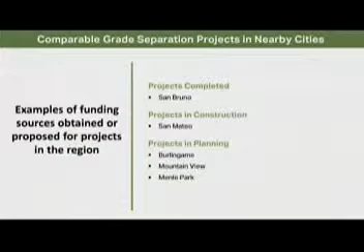City staff asked us a really good question, which EPS's previous consultant also looked at in their white paper from 2017, but we've now updated a bit: examples of funding sources obtained or proposed for actual grade separation projects in the region. We looked at five different projects: the only completed one we found was in San Bruno, one under construction in San Mateo, and projects in the planning stage including Burlingame, Mountain View, and Menlo Park—all communities facing similar challenges to Palo Alto in assembling a capital stack to build grade separation projects in these fiscally constrained times.

For San Bruno, it was a much smaller project than what you're contemplating here. It was a project cost of $155 million, completed in 2014, of which most of the dedicated funding came from the San Mateo County Transportation Authority Measure A. Another $55.9 million came from state funds, Proposition 1B funds, and finally there was a small federal amount of funding of $6.6 million.

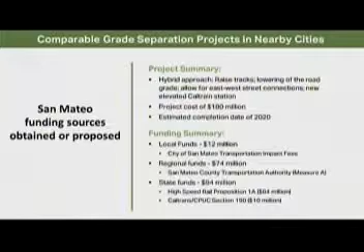In San Mateo, which is the project currently under construction, it's a hybrid project in the nomenclature of this process. It's $180 million, and will be completed, assuming all goes according to plan, in 2020. The capital they put together was also mainly state and regional: high-speed rail Proposition 1A, Caltrans CPUC Section 190 funds, San Mateo County Transportation Authority funds, and finally a small amount from the City of San Mateo's Transportation Impact Fee Program—that was the local source.

Let me get through and then you can ask questions—I've only got a couple more slides. Yeah, we'll open it up. I'll do you first, David.

I'm going fast. Other cities looking at this include Burlingame, Mountain View, and Menlo Park, and in the main they're looking at things like San Mateo County Measure A, Santa Clara County Measure B, which is relevant here, the Caltrans CPUC Section 190 funds, and local sources like transportation impact fees and what we might call value capture approaches—using city land or land that could be upzoned to generate additional real estate value that could be captured by the local jurisdiction to fund infrastructure.

Just some general summary findings which build on much of what we've already talked about at this and previous committee meetings. One reason we're looking at financing is that federal funding has been very limited for completed or under-construction projects, and we're not anticipating that will change. High-speed rail funds have been critical for projects completed or under construction, but this will likely be an unreliable source of funds in the future—not a source I would look to strongly for Palo Alto now.

Regional transportation measure funds have been and will continue to be a critical funding source for projects—particularly true here, specifically sub-regional sources. Local funding sources such as transportation impact fees, value capture approaches, and other types of fees assessed on employers have been explored, but have yet to make up a large contribution to actually completed or proposed projects. That's where we're going as a field, looking for ways local communities can raise more money to support these projects. But thus far, we don't have any examples of completed or underway projects where the local funding source makes up more than a very small percentage of the overall bucket of funding.

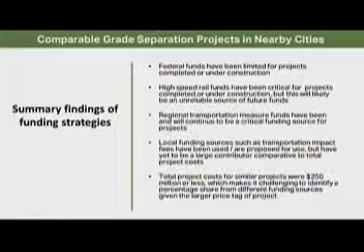Of the total projects we looked at, one challenge to the comparative research is that Burlingame had one alternative they were looking at, which was $960 million—the biggest chunk of money we've seen discussed related to grade separation on the peninsula. Their preferred alternative came in at around $250 million. So at least in the range of estimates we've seen, your grade separation projects would still be at the very top end in terms of capital costs, making it a total capital funding challenge on one end of the spectrum. But then again, you also have this very dangerous intersection, 8th in the country.

That's the summary I have for today, and I can take questions now. Okay, David's starting, and then I see Megan, Nadia, and Pat. We're going to have a few questions.

Quick question on the San Mateo project—do you know if any eminent domain was done for that project? No, but remember in San Mateo that area was the Bay Meadows project, so that's the local transportation impact fee because it was part of that whole thing. That whole area was getting redone anyway, and that necessitated some grade crossings. It would be Caltrans that would have to do the eminent domain taking, right? It could be the city, or it could be Caltrain, or the city could make it part of the bigger project with Bay Meadows.

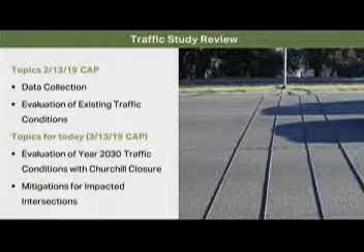So today's intention is, yes, we have done all the data collection, we have submitted the existing conditions report, but today we want to really talk about the intersections that have been impacted due to this closure, that we have seen will be impacted in 2030, and what are the mitigation measures that we are proposing for those impacted intersections. I just want to remind everybody that the mitigations are really important because we have gotten many requests to just close down things and see what happens.

I think Ed and the others in city staff have said we would never choose to do that. You would always put your mitigations in first and be strategic. Then when you close things down, hopefully things aren't so bad. So I think we want to make sure you understand the potential mitigations because they would go prior, so when you close, you have those in place and hopefully traffic runs fairly smoothly.

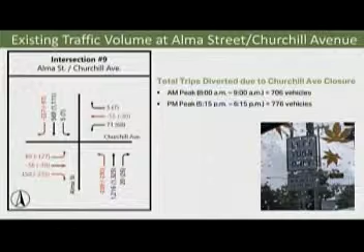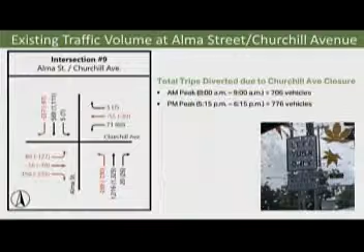Yeah, that's correct. So this particular slide kind of indicates that all the numbers we have in red text are the numbers that need to be diverted due to the closure of Churchill. We are looking at approximately 700 to 750 vehicles to be diverted during the peak hour. Just wanted to point out that even today at this particular intersection, we do not allow through movement from 7:45 to 8:30. So it's kind of going to be a same situation, but over the 24 hours.

Trip distribution is basically based on the Palo Alto travel demand model as well as the OD data that we had collected. As you can see, the maximum traffic will be diverted to Embarcadero, Oregon Expressway, as well as Emerson Road. If you want to look into it in more detail, I'm available to talk about it after the meeting.

Question, point of clarification: are you saying that traffic is just the through traffic or also the turn traffic? Also the turn traffic. Okay, yeah.

So based on the analysis that we did, we looked into these 8 intersections to be impacted. And when I mean impacted, it means that the level of service is at an unacceptable level today as well as in the year 2030.

When we started looking at the proposed mitigations that could be implemented at these intersections, we thought that intersection number 3, 4, and 8 need to go together because they are very closely spaced, and whatever we mitigate on one intersection would not just work by itself. So it would be a good idea to mitigate all 3 of them together as a group.

The next 3 intersections are CMP intersections, and the level of service criteria for those is level of service E, to consider that it is working at an acceptable level. The other 2 we're going to talk about are Alma Street and Oregon, and intersection number 15, which is Embarcadero and Cooper.

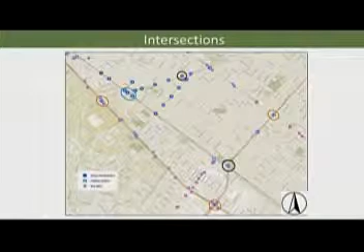Just a graphic to show you the locations of these intersections that we are talking about. As you can see, 3, 4, and 8 are really closely spaced, so whatever we do at one is going to impact the other 2.

Talking about intersection number 3, 4, and 8, here are just the existing controls that we have at these intersections, as well as the existing turning movements that are going to be rerouted. So the ones in red, we are deducting from that intersection, so they won't be showing up at that intersection. The ones shown in green are the traffic that we are going to add at that intersection.

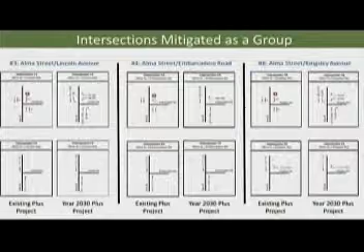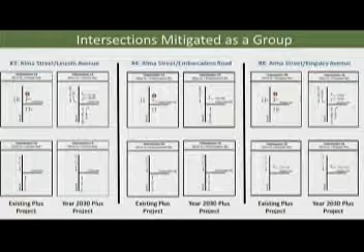This shows the numbers for existing, plus project conditions, with the closure, and year 2030 plus project. When we evaluated these intersections, we know even today they do not operate at an acceptable level of service, they operate at level of service F. But when we take this further and close Churchill, we'd see more traffic diverting, making it even worse than today. So we need to mitigate them.

The reason these intersections are experiencing such high delay is because of the westbound left turns. The through movement is so heavy that you don't get enough chance to make that turn and merge into traffic, and that's where the delay is caused. When you look at the entire intersection, it's not operating at an acceptable level of service. We also ran the traffic signal warrants, and they do meet at the intersection of Alma and Kingsley.

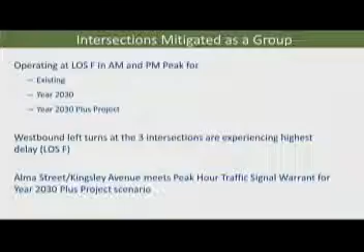So what we are proposing as mitigation is that Lincoln Avenue be right-in, right-out only. Move the traffic that wants to make the left turn to the intersection of Alma and Embarcadero, and signalize both intersections, Alma/Embarcadero and Alma/Kingsley, so they work as one single group. That could be done with just one single controller, but two intersections working together.

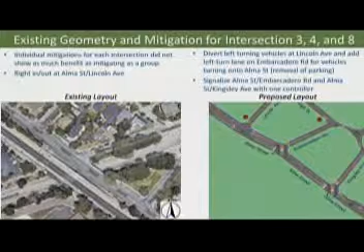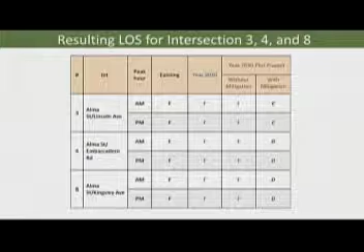If we implement that, as you can see, existing level of service is F, year 2030 it is F, and once we close Churchill it would still stay F. But if we implement these mitigations, we would see an acceptable level of service, as you can see: C on intersection number 3, D on intersection number 4, and D on intersection number 8, which is much better than F.

Here are some of the concepts we have created. This is the near-term option, considering we do not make any changes, just with the infrastructure we have in place today - what could be built out there. We could have the left and right-out movement from Embarcadero so you can make that left turn, signalize them, giving you an opportunity to make the left. So this is with your existing infrastructure.

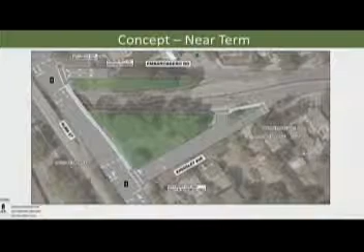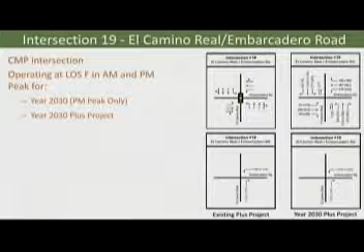The next intersection is intersection number 19, El Camino and Embarcadero. It is a CMP intersection operating at level of service F in all the peaks, not in existing - it is E in existing. CMP means congestion management program, and yes, it is managed by the county.

When you say long-term, how does that measure? In other words, what's the interval between the conditions that get worse, the F-minus conditions? Right now, when we say long-term, we're looking into the year 2030. So there are two different things: year 2030 is your long-term year, but if you're talking about mitigations for long-term, that will depend on how funds are available and things like that. So I don't have a year - probably Ed could answer that question.

Moving on to the intersection of El Camino and Embarcadero, we are proposing to install an additional westbound left turn lane as well as a northbound right turn lane, and optimizing the signal timings so that it can come back to an acceptable level of service.

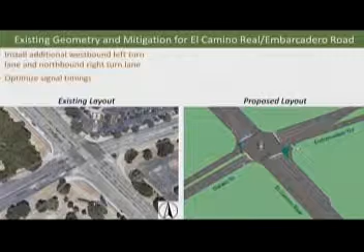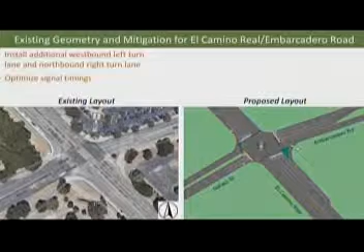You can see the proposed change on the proposed layout. The existing map shows what is currently out there, and what we are proposing is shown in the synchro layout that we are showing as the proposed layout.

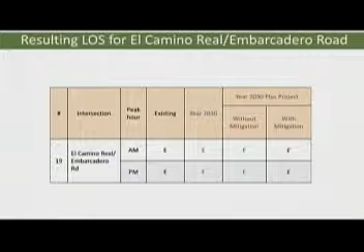If we do that, then we can get our year 2030 conditions back to an acceptable level of service, which is E. It doesn't get extremely better, but it does get back to an acceptable level of service.

The next one is intersection number 21, again a CMP intersection managed by the county, working at an unacceptable level of service in year 2030 with the project and without the project.

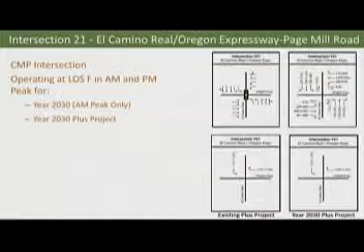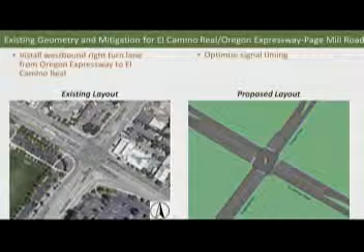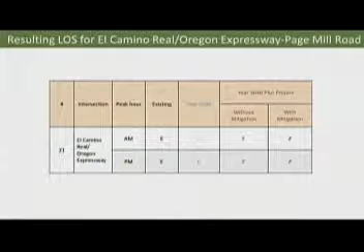We are proposing to install a westbound right turn lane from Oregon Expressway going onto El Camino, and optimizing the signal timings. That would reduce the delay at this intersection. It doesn't really make it better, but it does reduce the delay and brings it to what the conditions would be in 2030.

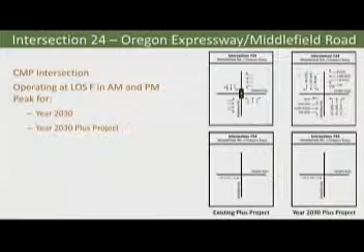Intersection of Oregon Expressway and Middlefield, again another CMP intersection, does not operate at an acceptable level of service in year 2030, with or without the project.

Our mitigation is to remove the southbound through and right lane and install an exclusive right turn lane, modify the signal phasing to include overlaps - meaning your left turn and right turn can go together without being stopped, so there's a continuous right turn movement rather than stopping and then making the right - and convert the northbound right turn lane into a shared through and right lane, adding an additional northbound receiving lane.

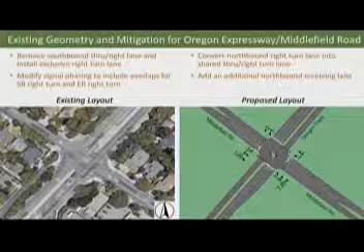I know it's a lot. That's why we sent it early. Yeah, but we are here, as I said. Just to be clear, we didn't see any of this until today. Oh, okay, there was other stuff, never mind. We're seeing this live in places, just to be very clear, making decisions today, so. Sorry, my bad.

We do need to keep in mind that the city is continuously looking into providing infrastructure for other modes of transportation too, and with that we would see a good amount of mode shift. It would be possible that some of these mitigations would not be required because you would have more people bicycling or walking for some of their day-to-day activities.

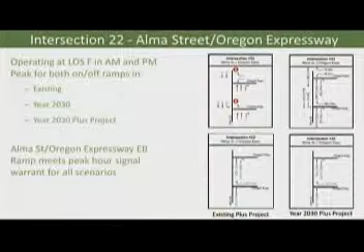The next one is intersection number 22, the on and off ramps with Oregon Expressway. It does not operate at an acceptable level of service in existing conditions as well as in year 2030, whether with the project or without the project.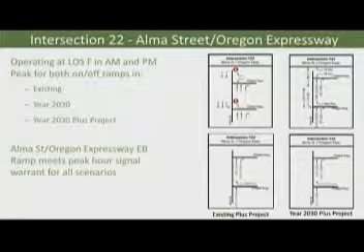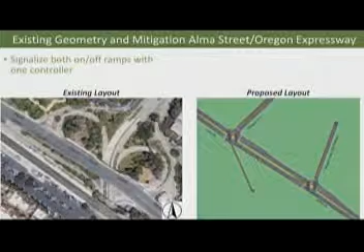We did run the peak hour warrants, and it does meet peak hour warrants for a signal, so a signal could be installed at these locations. That is what we are proposing - that we should signalize both the on and off ramps. That way we would have a smooth flow of traffic.

If we do that, then our level of service improves drastically. As you can see, F goes to A, and F goes to C at the other intersection.

Intersection number 15, this is the intersection of Embarcadero and Cowper. It does operate at an unacceptable level of service.

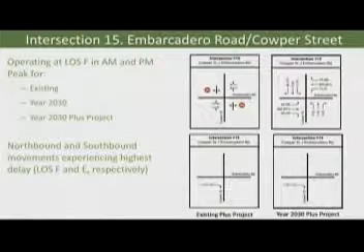As you can see, there's not a lot of traffic coming from the side street, but because there's a lot of traffic on Embarcadero, they have difficulty merging onto Embarcadero, and that's where the delay is, because they do not find enough gaps to merge in. That is the reason this intersection is working at an unacceptable level of service.

What we are proposing is that Cowper could be converted into right-in, right-out only in both the northbound and southbound direction. This could be done either for 24 hours or just for the peak period, because that would divert that traffic onto Waverly and add it to the existing volume there. Because the volume is so low, it really does not impact existing operations at the intersection of Waverly and Embarcadero.

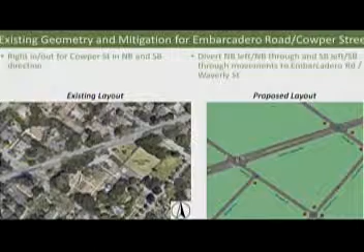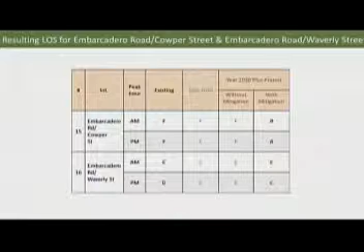As you can see, if you do that, the level of service at this intersection would get better - from an unacceptable level of service of F, it would operate at an acceptable level of service B. And looking at intersection number 16, Embarcadero and Waverly, it does not impact that intersection - the traffic we add to Waverly is so minor that you won't even notice it.

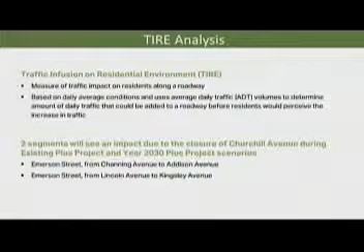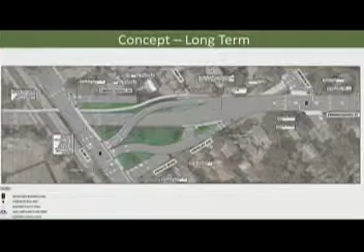So that's a widening, what I mentioned about, that once you take the bike and pedestrian path underneath the bridge, it gives you room to widen Embarcadero and add the fourth lane. But does that mean you have to do a whole new overpass? You're gonna have to do the whole thing over again.

There might be a way you can work it out. You could use the existing structure and still manage to get it done. Okay, we'll let Etty weigh in, so you guys got traffic guys talking about construction projects. Yeah.

Anyhow, this is just a concept at this point. Gary, we'd have to look at what that impact would be to the whole overall structure itself. What his concept here is to take the bike lane, and maybe you modify the abutment and then you can gain a lane, but we'd have to actually look to see its viability from a construction and structural standpoint. But that aside, this is just looking at the number of lanes and how that is mitigated from a traffic solution standpoint. But thank you, that's a good observation.

Stuart Hanson, Duveneck, just a quick question. Are you planning to do another study like this with Palo Alto Avenue closed to see what happens to traffic on Embarcadero and so on? So City Council took an action, when was that? January, that Palo Alto Avenue will be included in the overall downtown plan. So it's no longer part of our scope at this point in time.

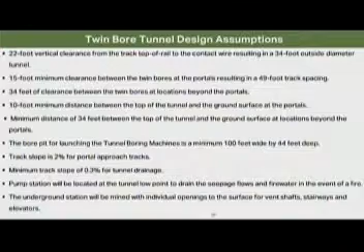The next slide here is really about the criteria. I'm not going to go over this because it's a lot of bullets, but this is the criteria used for the tunnels.

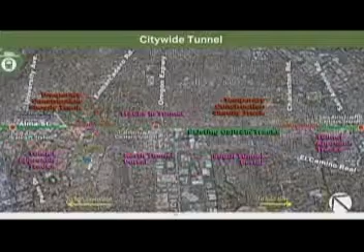This is just a plan view, which you actually see in the video. North is to the left and south is to the right. The red indicates where we have to build shoofly tracks for the north portal and the south portal, which we actually have to build in order to get the tunnel boring machine in and actually bore from those locations that will go underneath the California Avenue station.

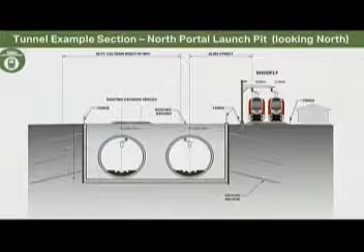At California Avenue Station, now we'll just go through the video, and I'll try to narrate a little bit about it, but there's a lot of text here. You've seen a portion of this already, as the north portal was presented at the last CAP meeting, and this is a video of the entire tunnel.

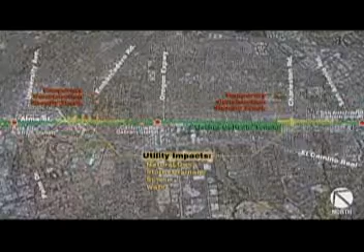So the first thing we're going to have to do is relocate utilities, get the property acquisitions, construct the temporary shoofly tracks, and then construct the portal. Whether you start from the north end or the south end, it doesn't really matter—you're still constructing a portal and getting your tunnel boring machine in.

So we're going to fly into the north portal. First thing is remove vegetation, acquire the property, relocate the utilities. Once that's done—and we have quite a few utilities within Alma.

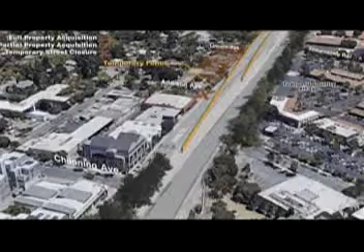The different colors here are full takes versus partial takes. You would also then close the streets that access onto Alma, which here we have Lincoln, Kingsley. And then once you have that, you would close Alma Street, because Alma Street would actually be the place where we place the temporary shoofly, which we would construct.

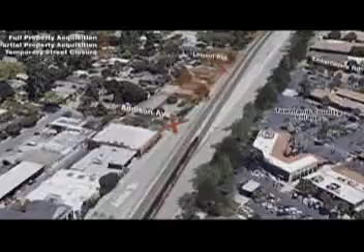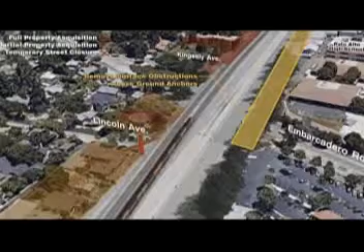And once you have the temporary shoofly constructed, you move the Caltrain trains onto that, and now you can actually build the trench section that allows you to get through. This also requires a complete reconfiguration of Embarcadero, because by the time we hit Embarcadero, we're only in a trench, so we would have to probably put Embarcadero in an overhead structure above the trench section.

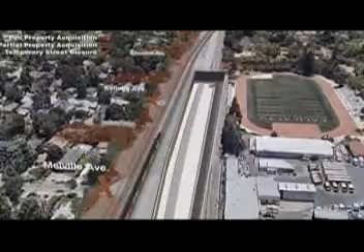You can continue to build this trench section. By the time you get to just about where Churchill is, you'll be at the portal, and there you can actually start your tunnel boring machines. In this case, we're looking at a twin bore, so you'll have two tunnel boring machines, or you can do one tunnel boring machine at a time. And then you start your bore, and you actually start to descend into a tunnel structure.

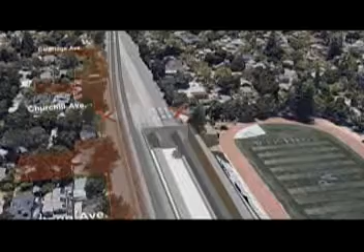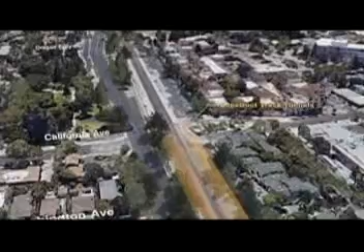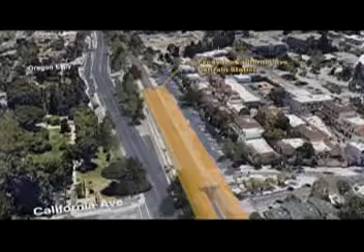When you get to California Avenue, we would have to reconstruct this entire station to a below-grade station. It would be roughly around 60 feet deep, so just think of all the vertical circulation we have to build into a train station that's below grade.

You could use a mining technique like they're using in San Francisco for the Muni Chinatown station, but it's still a complicated construction, keeping an above-ground station operational while you're building a below-ground station. The tunnels continue until we get to the south portal.

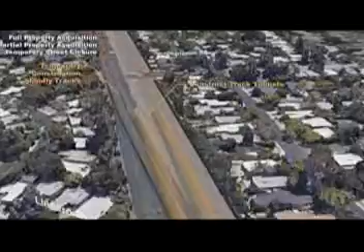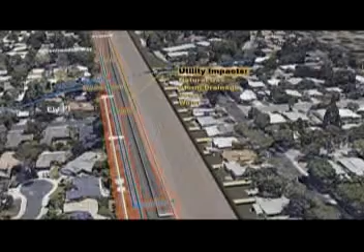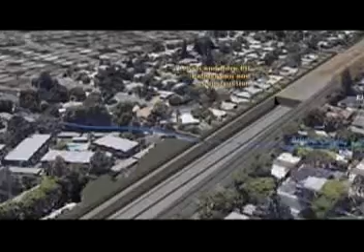And we do have some property acquisitions in the south section as well. We would also have to deal with the creek crossing because at this location we're in trench.

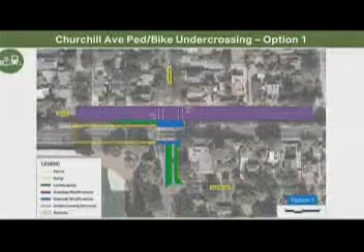I went too fast. Oh, you're doing it. We're both doing it, sorry, I have a keyboard. I don't, yeah, I have power.

You have power too. So this is a rendering of what that would roughly look like. You're looking at Alma Street, the sports field and the train, and you can see the undercrossing going under there and coming back up adjacent to the Embarcadero bike path right next to it. There's a number of things to work out, probably about the details of how it connects up, but this gives you a sense of what it looks like.

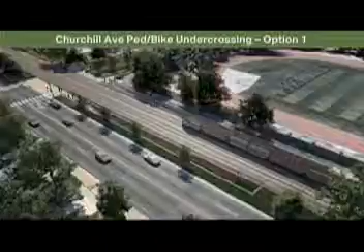Okay, I was watching Elliot to see if he was going too. So this is another rendering looking down the tracks. You can see the two ramps going down on either side of the tracks that give you access. Don't get too caught up in exactly how that access looks - the point is you have a plaza for access on one side, and some type of plaza or access on the other side.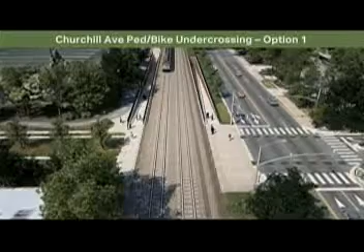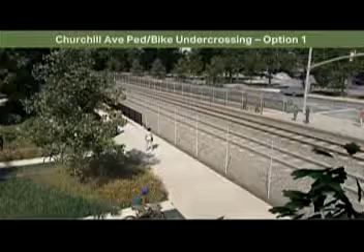How long is the ramp? The ramps are about 200 to 250 feet, and the undercrossing is about 45 feet long. Have you looked at whether people will use it or not?

I'm not sure where you're going with that, can we get through all this and then have a conversation when we come back to that? I really want to get this done.

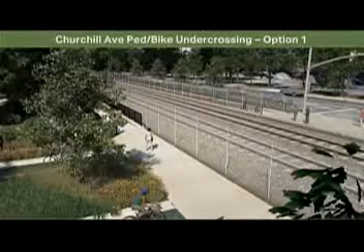So this is just a final rendering again from the side, on the school side, to give you a sense of option one. There would also be a stair access right along, as the Embarcadero bike path comes along parallel to Caltrain there, you'd have another access point which you could fit in, providing direct access to people walking on that path.

Just a note to self, we're showing standard Caltrain fencing along the right-of-way, but in reality it would definitely be wrought iron or something much more upgraded than that.

Gold-plated, Swarovski crystals. What about the fencing? We spend a lot of time on fencing, that makes a lot of sense, we'll make that a note. More and more renderings, very important.

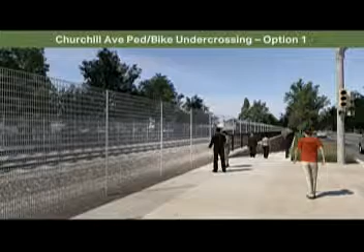And then this is again a view along Alma Street from that plaza going down onto the ramp, to give you a sense of that, again the fencing, but important to understand the appropriate kind of height and dimension for that fencing.

So the second option that we talked about is one that crosses both Alma and the Caltrain tracks. We went back and forth and looked at some ways to do this. The basic concept is that you have a tunnel or a ramp down that will start in the middle of Churchill on the eastern side of Alma Street, and then come out on the far side by the school, bending to put you in the general area of where you can maybe get access up to the existing path, or we need to figure that out a little bit.

We've done a little bit of thinking about how to make access to that central tunnel, which is atypical, so that it can be done as safely as possible. This is not a high traffic street, especially since you can no longer go through, so there's some room to be creative here. The other thing to note is that you do lose parking for the length of that tunnel and a little bit beyond, to enable the tunnel to fit in.

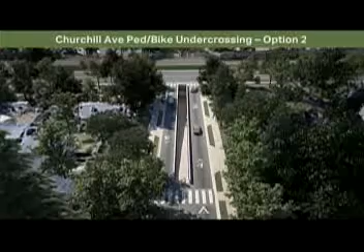Some renderings of that image - you can see we've got a little raised crossing right in front of the tunnel, so we bring vehicles down and slow them as they approach or leave the area of the crossing, which I think is probably pretty important, because we'll have people walking along those sidewalks coming across to the ramp in that location.

Here's an image of somebody biking down into the tunnel and then back out potentially to the other side. There actually are houses a lot closer than that, but you get the general idea.

On the far side, you have this opportunity to bring again some stairs, because you have a lot more space, so you can bring people out to the street there more directly if they're trying to access locations that aren't at the far end of that ramp, and you can see the ramp there as well.

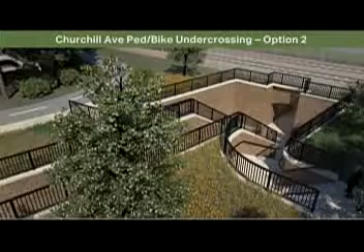So this is kind of a summary for you. Do you want to take this one? Similar to what we did on Meadow and Charleston, we have two options that we're looking at here, so we're just using that color code.

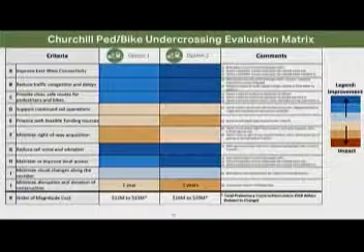Obviously some of the big differences are whether you cross Alma at one versus the other, and you do get some benefit from that. So two will be a little longer to construct because it's longer, more expensive, et cetera. But there are some distinguishing factors between those, and then there's another one too.

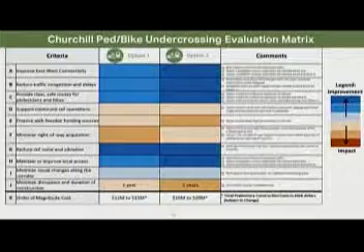That one is more just the engineering factors we've talked about before. All of these would be orange to red because they're all impacts, but generally, because we'd be crossing Alma, the utility relocations would be more for option 2. You do have some impacts during construction potentially to the path along the high school and things like that, but there are no design exceptions or anything related to these.

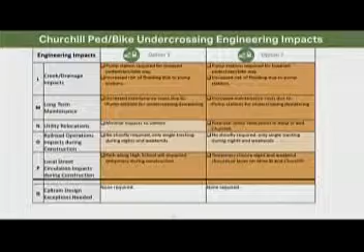I'm going to start with Tony because he had the floor when I moved us along. I'm wondering if you've looked at other alternatives, such as the Homer Tunnel - it cost about $6 million at that time, and the tracks are about 2 feet higher than they are at Churchill, but it was easier to get under it.

Right, and before, at the previous XCAP meeting, we kind of called those variations - options 3 and 4, where we could change the elevation of the railroad tracks, but obviously that's more expensive. So that could obviously be something we could consider for either one of these alternatives as a variation down the road.

Okay, I have another question. If we had to consider a roundabout at Embarcadero and Alma, what's the radius of that roundabout for 2 lanes? Do you have that off the top? Yeah, I don't have that off the top of my head, no.

Okay, Nadia, and I think Phil's got a hand up. I see both Megan and Dave.